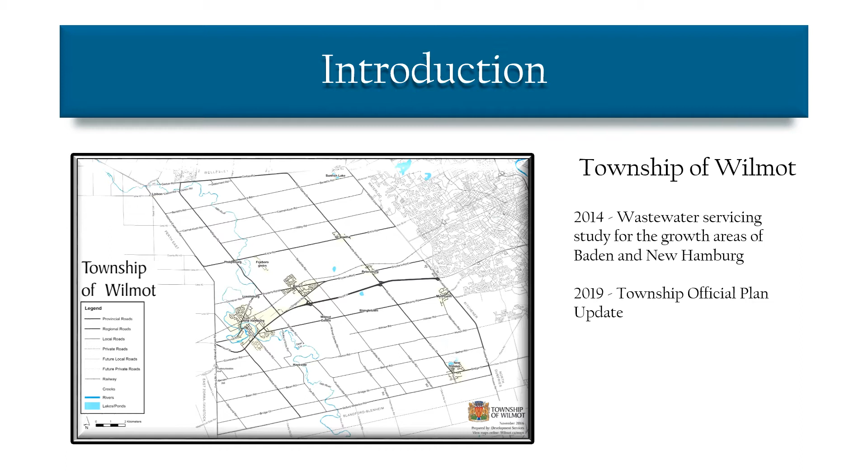The additional expected growth identified in the updated 2019 official plan for the Township of Wilmot has prompted an overall review of the servicing strategy for the entire Baden-New Hamburg area. The Township has entered into a Schedule B Municipal Class Environmental Assessment for the Baden Trunk Sanitary Sewer. The notice of commencement was issued on June 17, 2021. This is the first public information center for the Baden Trunk Sanitary Sewer Environmental Assessment. We look forward to your comments and participation.

An environmental assessment is a process used to identify potential environmental impacts and avoid them where possible. The benefits of the environmental assessment process include incorporating environmental factors into the decision-making process, minimizing or avoiding adverse environmental effects before the project is initiated, providing an opportunity for meaningful public and stakeholder participation, and providing comprehensive decision-making that considers a range of factors.

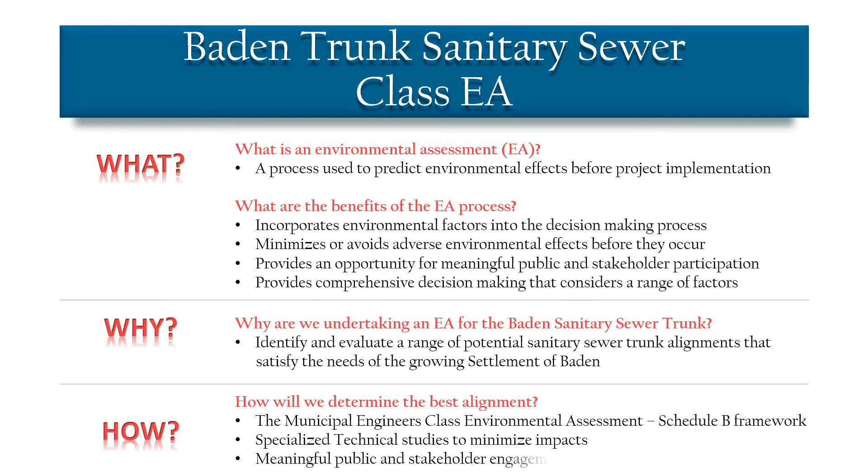We are undertaking an environmental assessment for the Baden Trunk Sanitary Sewer to identify and evaluate a range of potential sanitary sewer trunk alignments that satisfy the needs of the growing settlement of Baden. It will be accomplished by following a Schedule B framework outlined in the Municipal Engineer's Class Environmental Assessment Manual, performing and reviewing technical studies to minimize impacts, and by having meaningful engagements with the public and stakeholders.

The Municipal Class Environmental Assessment is a process that provides a decision-making framework enabling the requirements of the Environmental Assessment Act to be met in an effective and efficient manner. Broadly defined, environment includes the natural, social, cultural, built, and economic environments. It applies to municipal infrastructure projects, including roads, water, and wastewater projects.

Schedule B projects refer to the magnitude of anticipated environmental impacts and are subject to the prescribed screening criteria as outlined in the Municipal Class Environmental Assessment Manual. It provides for comprehensive decision-making that considers a range of factors. A critical part of the process is consulting with all those who may be affected and the relevant review agencies.

A project team was put together to best identify possible environmental impacts. Each team member will perform a detailed study in the area of their expertise. These studies will be used to assess each alternative in order to identify which one best satisfies the problem-opportunity statement.

There are 3 key phases to a Schedule B class environmental assessment. Phase 1 begins with the notice of commencement, where problems or deficiencies, as well as opportunities, are addressed and formalized into a problem-opportunity statement. The process in Phase 1 helps to determine which schedule to use.

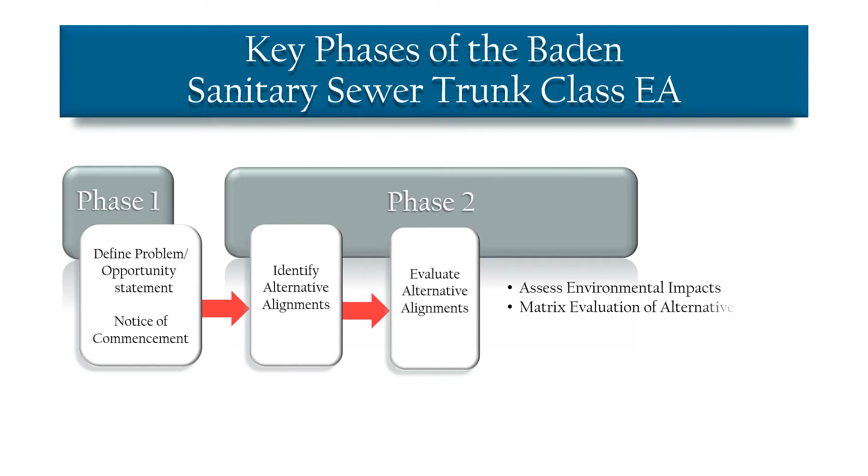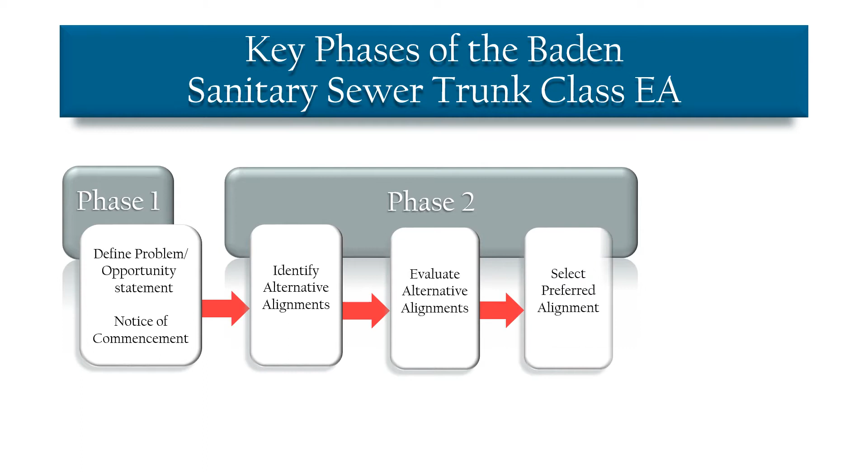Consulting with the review agencies and the public to solicit comment and input is key. The final step of Phase 2 will be to select the preferred alignment identified from the matrix and taking into consideration the input and comments received from the review agencies and the public.

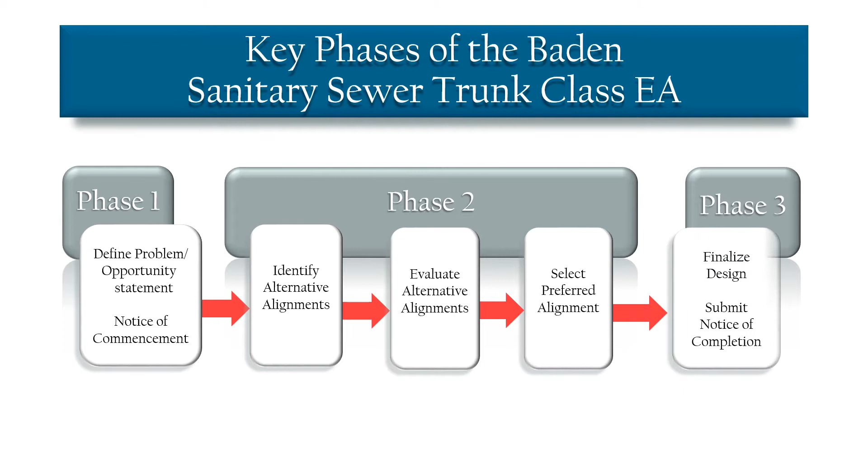The final phase of the Schedule B Class EA process will be to finalize the design of the preferred alignment and submit a notice of completion. Throughout the environmental assessment process, the public and stakeholders have an opportunity to actively engage and participate in the decisions affecting their community. Currently, we are at the beginning stage of Phase 2.

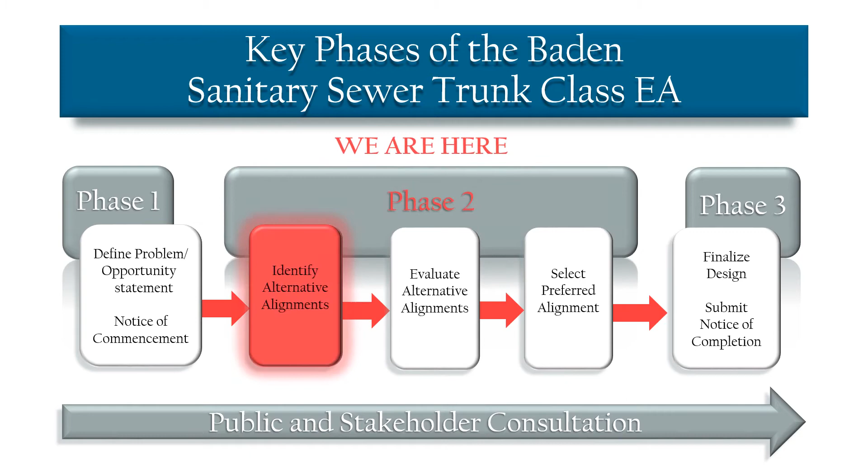This study is located within the settlement of Baden. It takes into consideration the future development of Baden as prescribed by the Provincial Policy Statement of 2020, the Places to Grow Plan of 2020, the amended Regional Official Plan of 2015, and the Township of Wilmot Official Plan of 2019.

The urban areas, seen in gold, are the primary focus for current population and employment growth. Lands located outside the urban areas are deemed countryside. However, the countryside line, seen in silver, represents the future expansion to the Baden urban area boundary to accommodate future growth. The proposed Baden Trunk Sanitary Sewer will service the areas east of Nafziger Road within the countryside line.

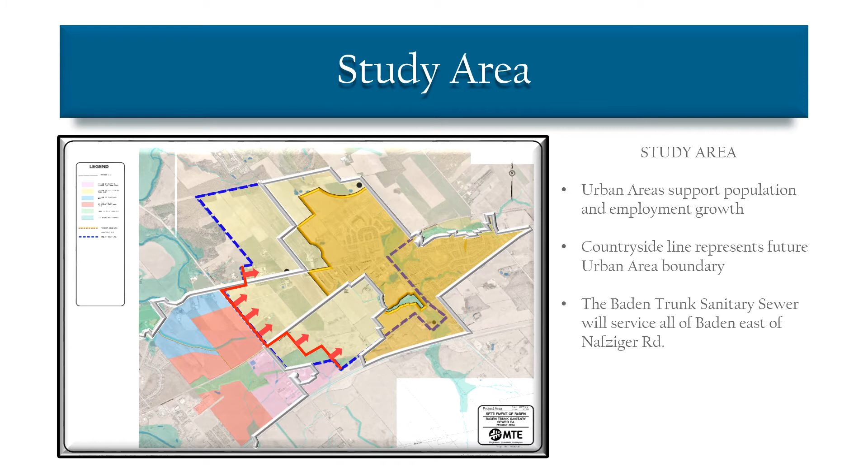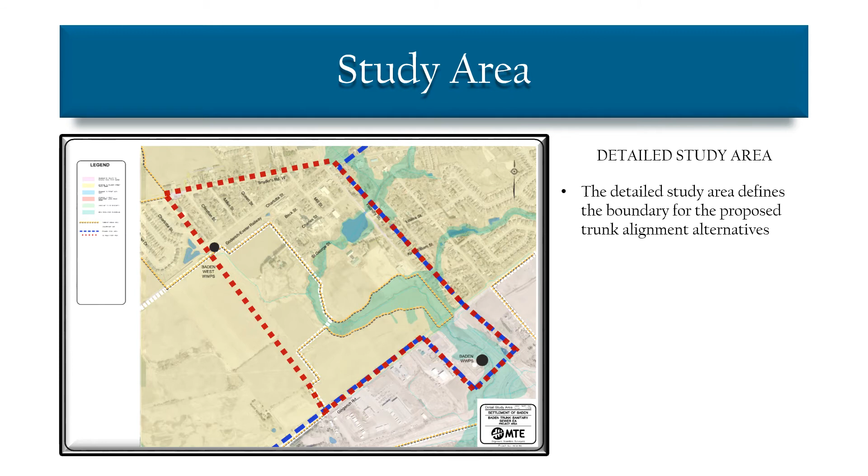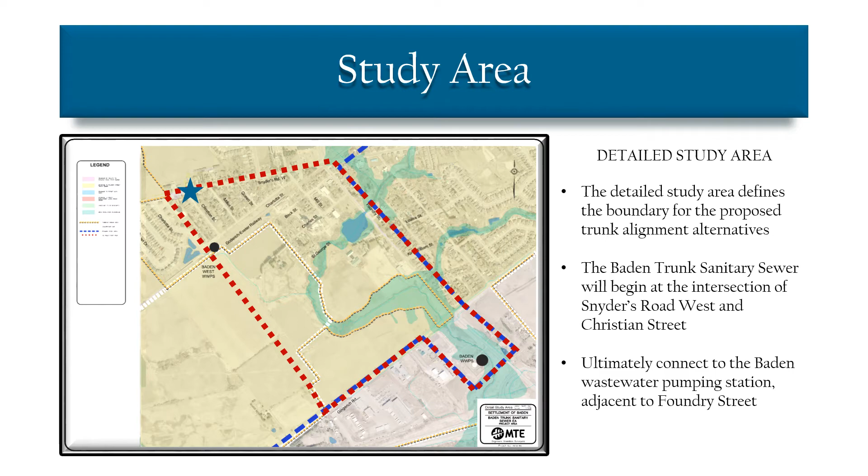Aside from the first alternative, the Baden Trunk alignment alternatives will begin and end within the boundaries of the detailed study area. The alternatives located within the detailed study area will begin at the intersection of Snyder's Road West and Christian Street, and ultimately connect to the Baden Wastewater Pumping Station, adjacent to Foundry Street, just south of Gingerich Road.

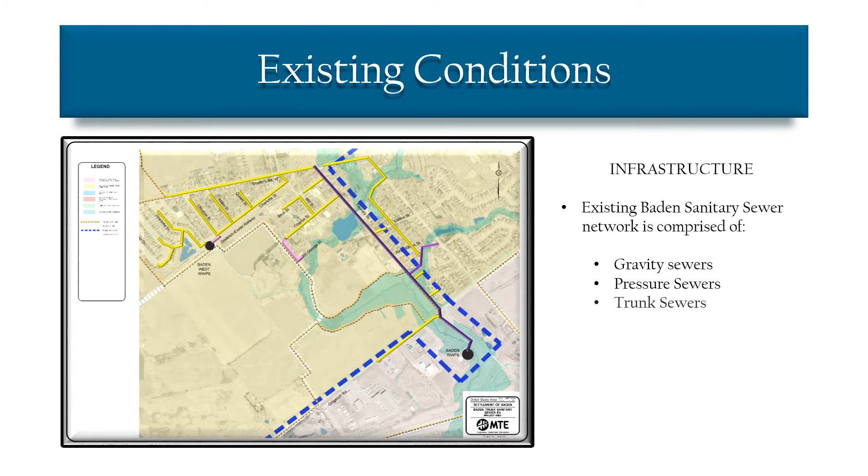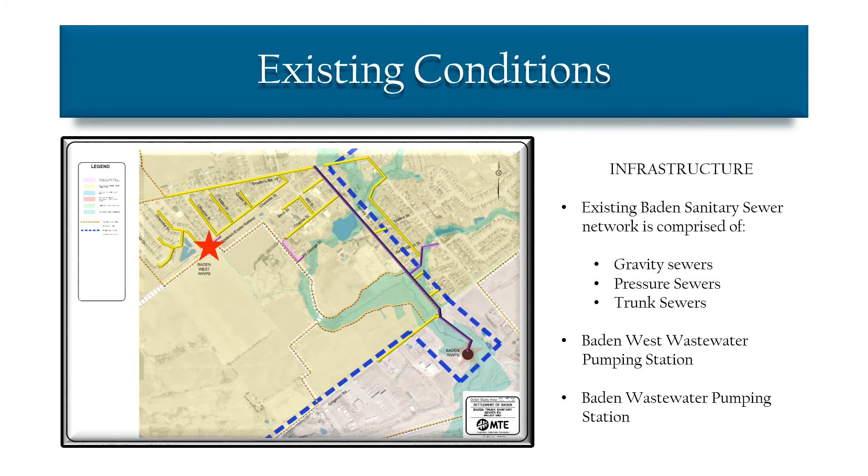The existing Baden sanitary sewer network is comprised of gravity sewers, pressure sewers, and trunk sewers. There are 2 wastewater pumping stations. The Baden West Wastewater Pumping Station is located on Charlotta Street, while the Baden Wastewater Pumping Station is located adjacent to Foundry Street, just south of Gingerich Road.

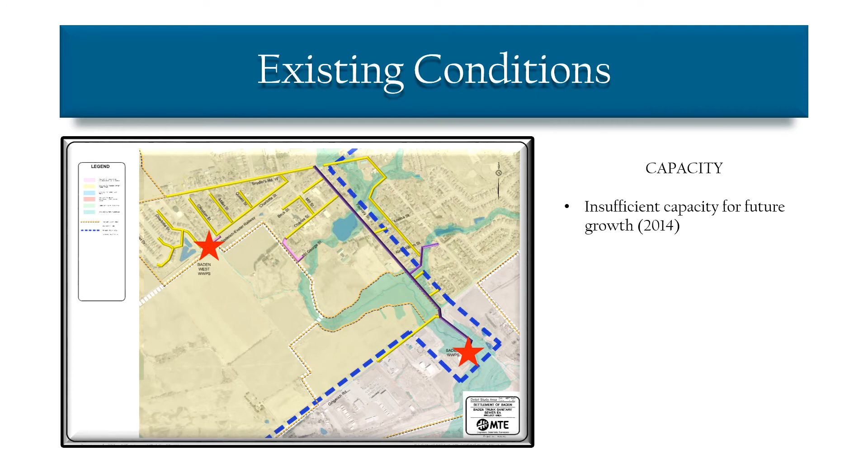The wastewater servicing study of 2014 identified that the existing sanitary sewer did not have the capacity to support future growth. It also identified that under existing conditions in 2012, the sanitary sewer and the Baden wastewater pumping station on Foundry Street were over capacity with respect to peak flows.

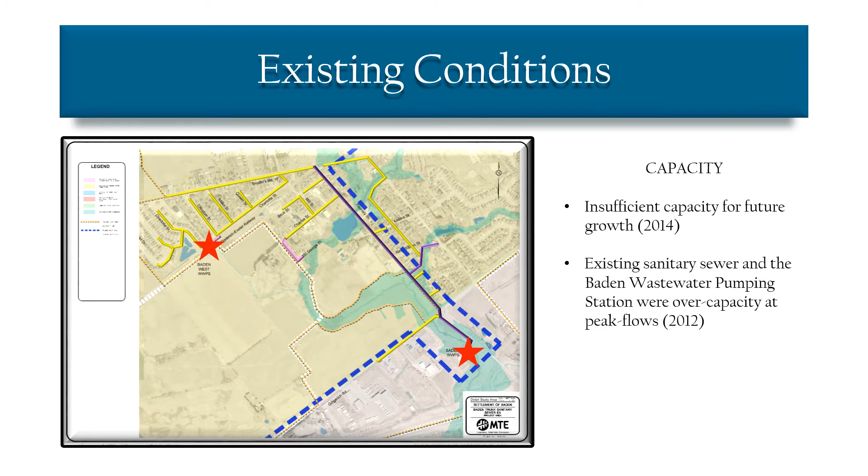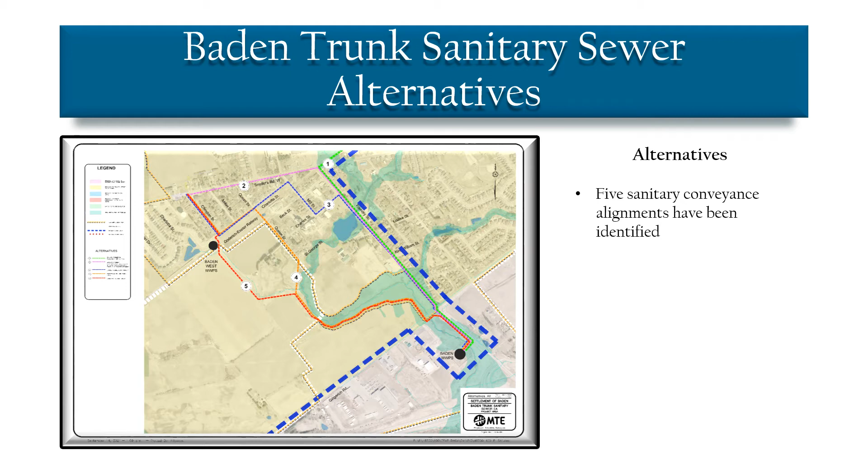Five sanitary conveyance alignments, including a do-nothing alternative, have been identified as possible alignments for the Baden Trunk sanitary sewer. Each alternative has its own unique set of impacts. Aside from the do-nothing alternative, the 4 remaining alternative alignments completely lie within the detailed study area.

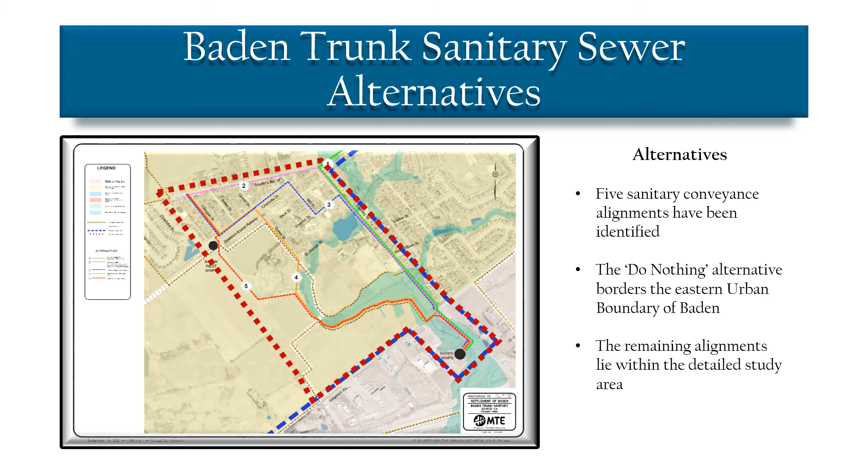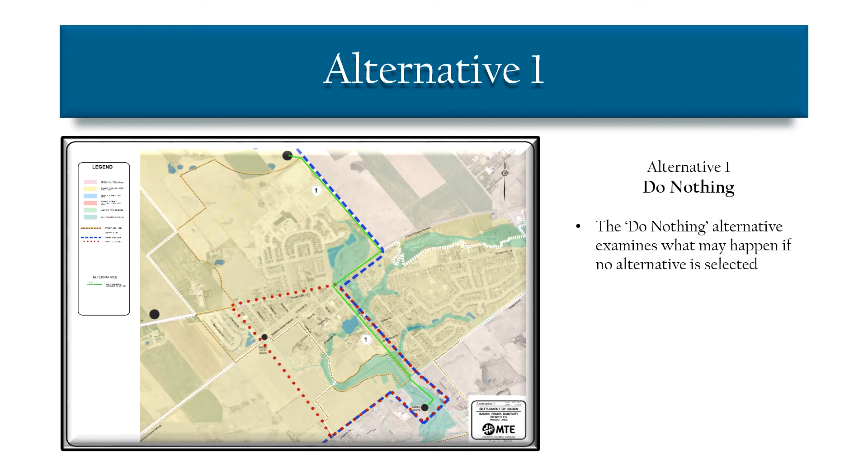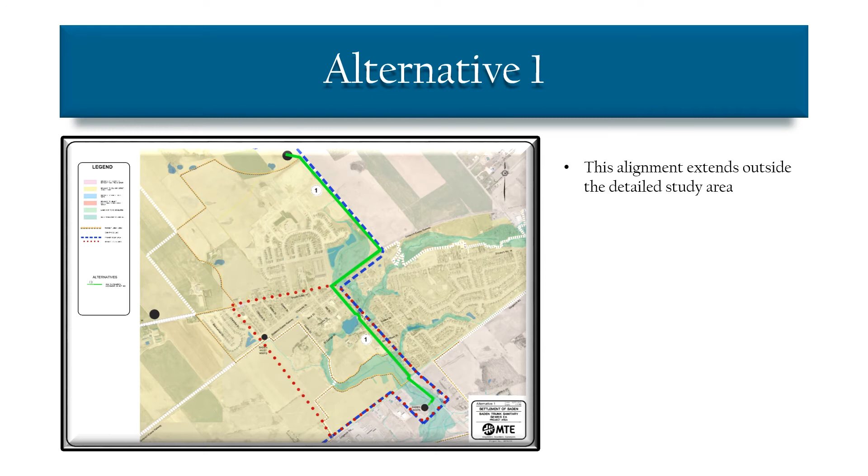Alternative 1 is the do-nothing alternative. It examines what may happen if no alternative is selected. In this case, the current wastewater servicing strategy of 2014 will be carried out. This alignment begins at the northeastern urban boundary of Baden, runs southwest along the railroad, and down Foundry Street to the Baden wastewater pumping station. This alternative would require constructing a pumping station, constructing a pressure sewer along the eastern urban boundary, crossing a railroad, upgrading existing sewer, and integrating it along the regional road.

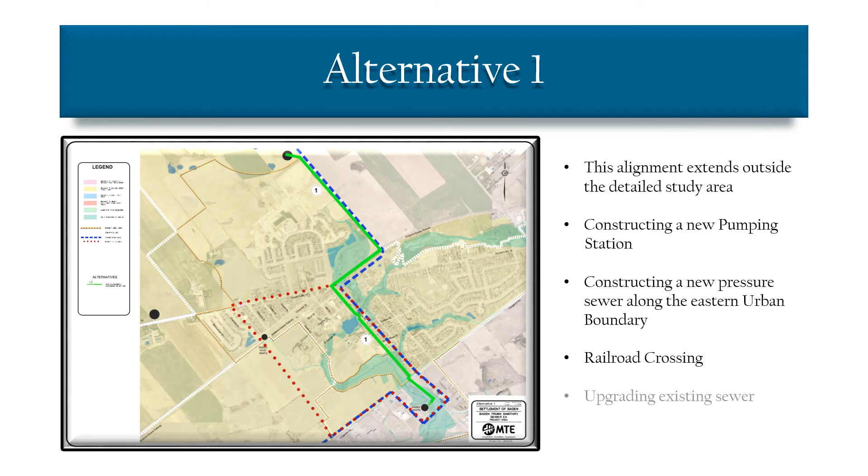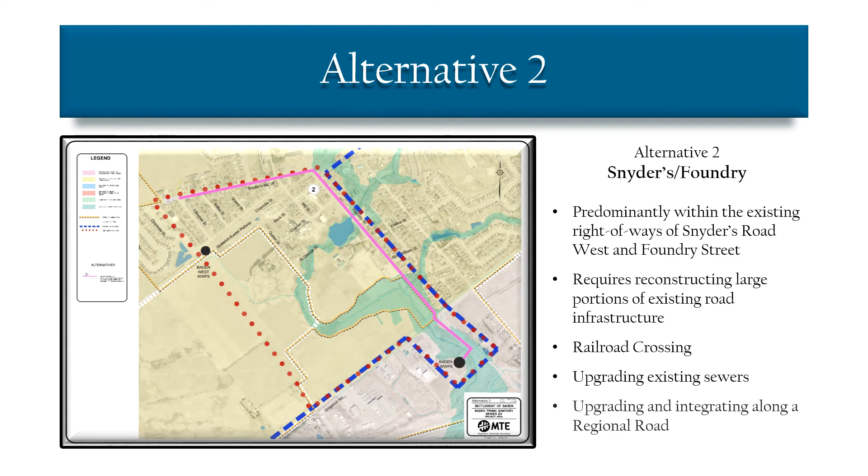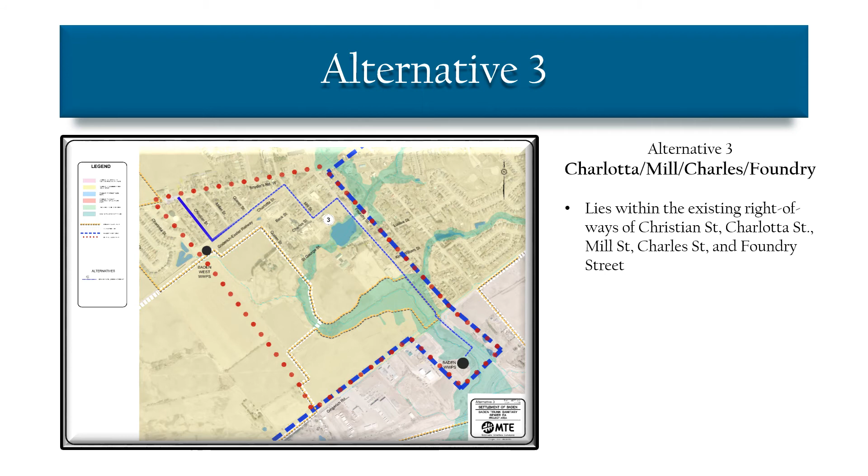Alternative 3 lies within the existing right-of-ways of Christian Street, Charlotta Street, Mill Street, Charles Street, and Foundry Street. This alternative would require reconstructing large portions of existing road infrastructure, crossing a railroad, upgrading existing sewers, as well as upgrading and integrating sewers along a regional road.

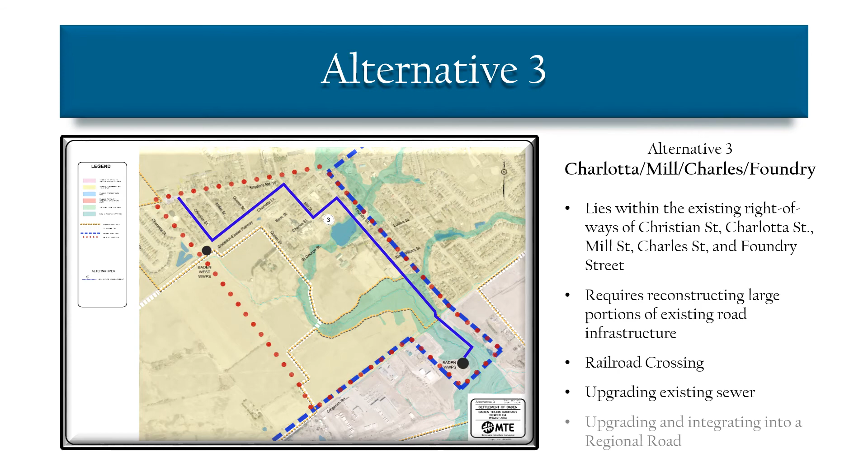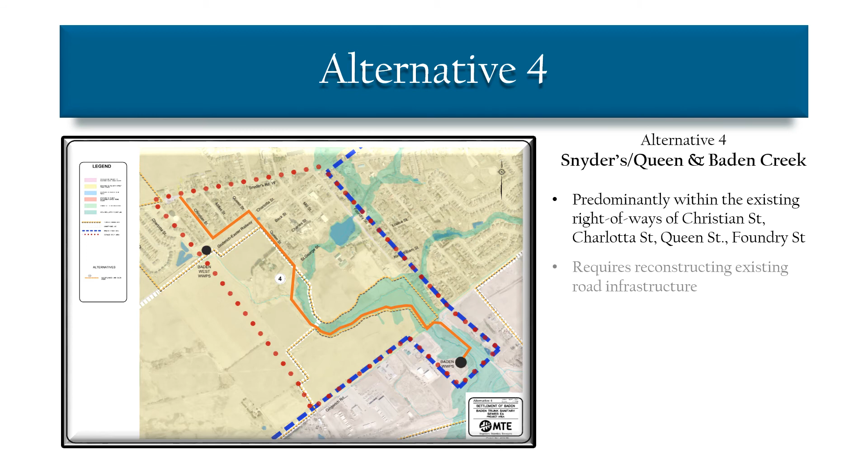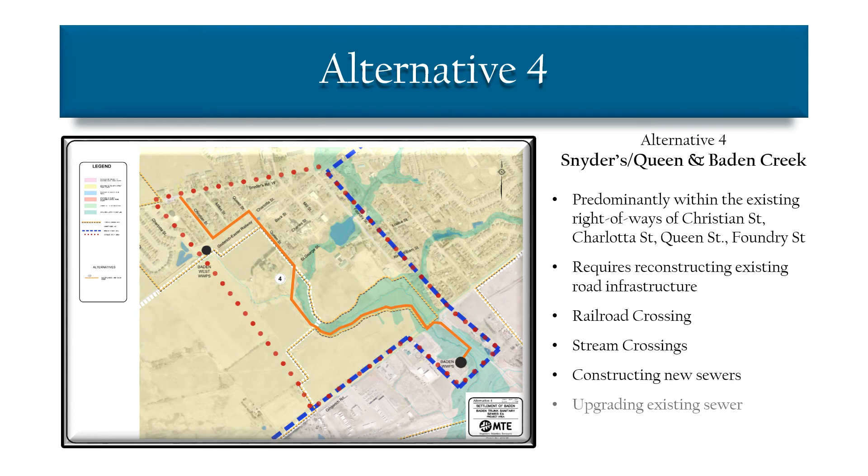Alternative 4 predominantly lies within the existing right-of-ways of Christian Street, Charlotta Street, Queen Street, and Foundry Street. This alternative would require reconstructing existing road infrastructure, crossing a railroad, multiple stream crossings, constructing new sewers, upgrading existing sewers, as well as upgrading and integrating sewers along a regional road.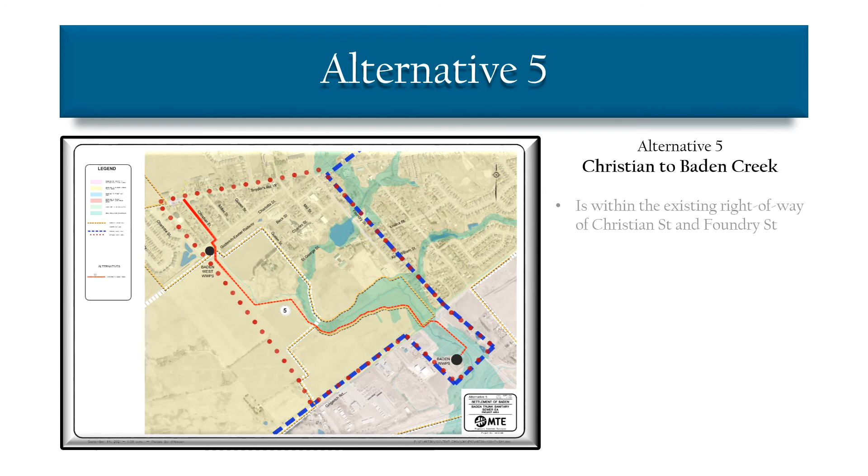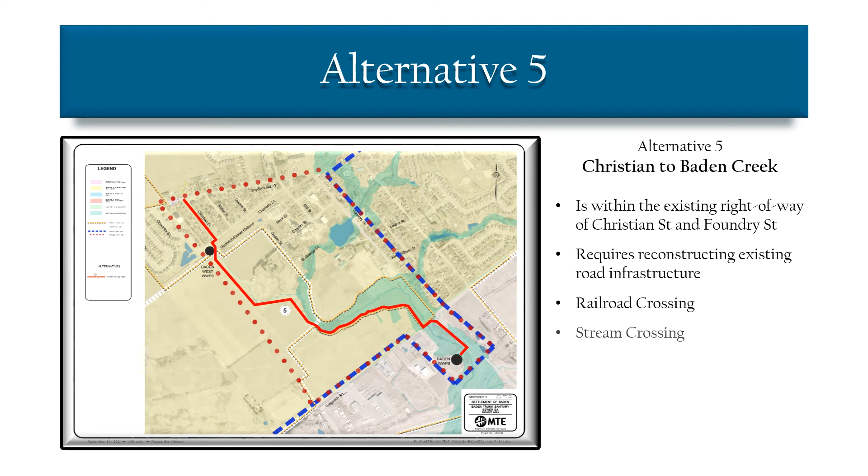Alternative 5 affects the existing right-of-way of Christian Street and Foundry Street. This alternative would require reconstructing existing road infrastructure, crossing a railroad, a stream crossing, constructing new sewers, upgrading existing sewers, as well as upgrading and integrating sewers along a regional road.

The next step of the environmental assessment process is to evaluate the alternatives based on the following criteria. Each alignment will undergo a numerical evaluation. The numerical evaluation approach was selected as the preferred scoring methodology. This methodology requires a 1-to-10 scoring assessment of the alternatives in a matrix form.

Comments justifying the scoring will be included for each alternative. For each factor, the least preferred alternative receives a score of 1, and the most preferred factor receives a score of 10. All scores will fall between these two values. The relative score of the alternatives between the high and the low will be justified in the commentary utilizing the professional judgment of the project team and the reviewing agencies. The recommended alignment will then be identified based on the highest score.